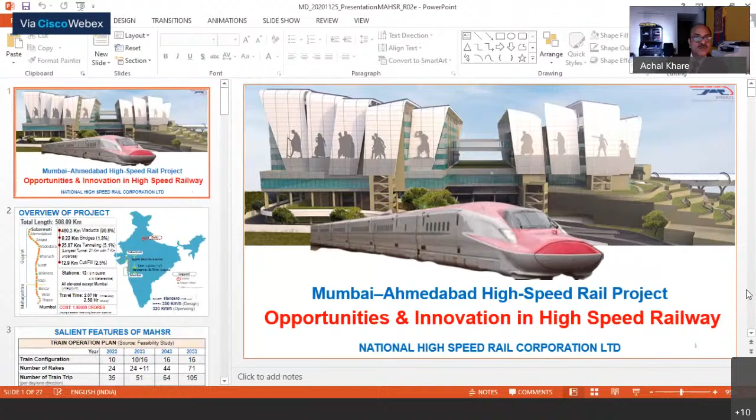You may put it on the slideshow. Okay, yes sir, we can start. Good to go. Let's go to the next slide please. Okay, I think this, no, first slide.

Most of the details have already been spoken by earlier speakers, but just to tell you, this is mostly elevated. As you see, 460 kilometers is on viaduct and around 25.9 kilometers is tunneling, which includes an undersea tunnel of 7 kilometers under the Thane Creek.

The total travel time: I wanted to make it clear there are two types of services. Limited stop, starting from Sabarmati, the trains will stop at Ahmedabad, Surat, Vadodara, Surat and Bombay, that will take 2 hours 7 minutes, and all stop will take 2 hours 58 minutes. Design speed is 350 km per hour, operating speed will be 320 km per hour.

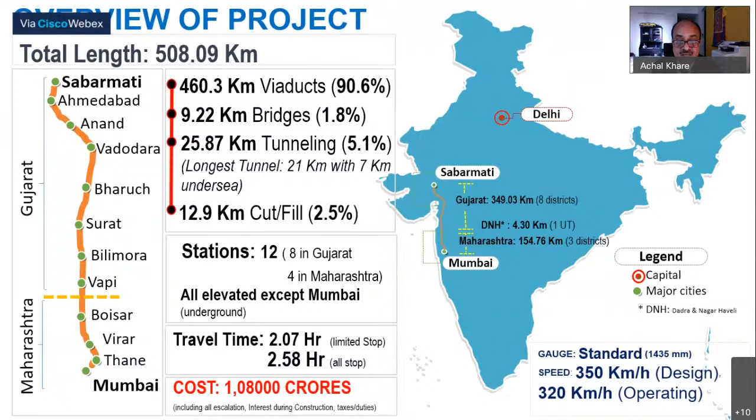Now, to begin with, we will start with a 10 coach train. We are procuring a total of 24 rakes. Each train will have a capacity of around 750, which may undergo a slight reduction for the luggage. Initially, we expect around 18,000 passengers each way, and peak hour frequency will be 3 trains per hour. Off-peak hour will be 2 trains per hour, meaning every 20 minutes you can expect a train, starting from 6 o'clock in the morning till 12 o'clock at night.

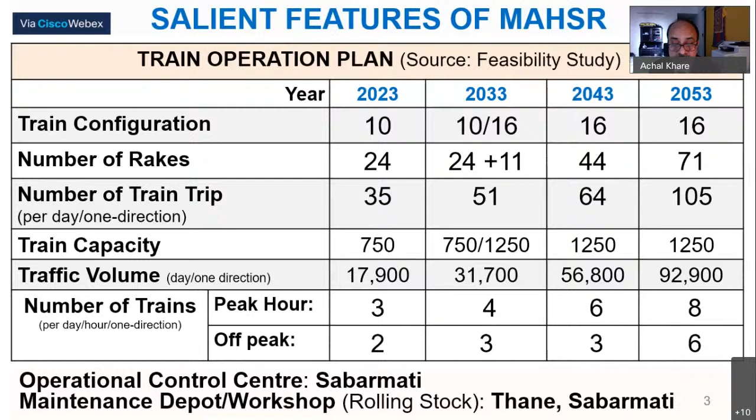Now this is something on technical features, some of you may be interested. We have 2 depots, one at Thane, another at Sabarmati. Sabarmati is going to have a big workshop also, so a lot of machinery requirement at Sabarmati. We'll have 12 traction substations, 2 depot substations, and 16 depot distribution substations.

OHE is for the first time in India going to use heavy compound catenary. 2x25 is being used in DFC also, but heavy compound catenary is being used for the first time. Total energy requirement will be around 1,100 million units every year. Signaling system is digital ATC, automatic train control.

Train acceleration is 0 to 320 km per hour in 310 seconds, and it will travel a distance of 18 km during this. Service braking is 167 seconds, so 8.5 km is the distance for braking. Power failure detection, emergency braking, can be done in 78 seconds, and still it will travel a distance of 3.87 kilometers.

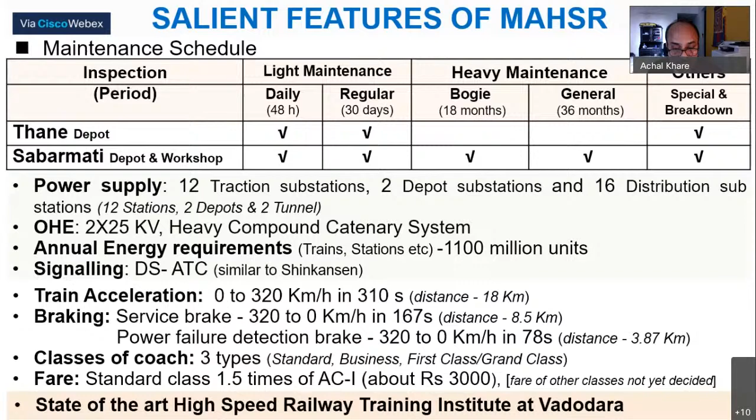There are 3 types of classes: standard, business, and first class or grand class as they call it in Japan. Standard class fare will be around 1.5 times of AC first, which will be around 3,000 rupees at the current rate. And we are coming up with a state-of-art high-speed training institute at Vadodara.

Now this I just wanted to share with you: for the first time in India, with Japanese collaboration, we are having a very effective disaster management system. These are all pre-warning systems: earthquake, rail temperature, wind pressure, and rain. I will not talk much about it because this is a subject in itself. But earthquake is, as we all know, Japan experiences a lot of earthquakes.

So this is a pre-warning system that as soon as a pre-warning is generated through the primary wave, they will be able to stop the trains before the secondary waves, which cause damage to the structure, hit the structure. So the basic idea is to stop train operation. Same way with rail temperature, the idea is if rail fracture takes place, stop the train operation. Wind pressure is the same thing.

If wind is blowing at a speed more than 108 km per hour, then operations will be stopped till the wind speed reduces. Rain is not a much bigger issue here because it's mostly elevated, except on the approaches of tunnels, so there we will be putting rain gauges to monitor. Criteria are yet to be set because it's not a very high flooded area, and being on an elevated route, it's not a big issue.

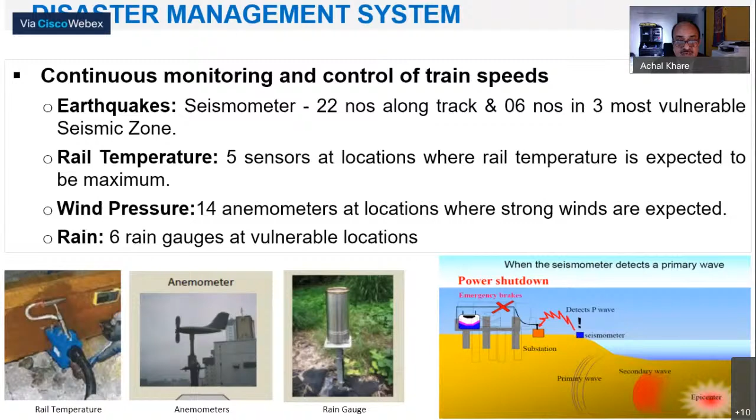Contract packaging may be of interest to some of you. There are 25 packages: 21 pertain to the main project, 4 to the training institute. Out of 4 in the training institute, 3 are complete; only the main building is yet to come up. And of the remaining 21, as Mr. Chaudhary congratulated me, we have already awarded 2 big contract packages, one for 237 kilometers, another for 88 kilometers, worth 32,000 crore rupees, in the state of Gujarat.

We have been making a lot of efforts to get maximum work allocated to Indian companies. As you know, whenever a project is funded by JICA, normally there is a condition that the lead partner will be Japanese. Here we didn't have that condition. We tried to put it in parts so that whoever is capable of doing a type of work should do it, giving preference to India, unless we don't have that technology and experience.

So with that, earlier a lot of civil engineering works were also with the Japanese, but now all civil packages are with Indians, and only the system packages - signaling, telecom, rolling stock, electrical, and the depot and workshop - are with the Japanese. So out of 25, 20 are with Indians, including track. In fact, track is a special technology, but they have been considerate enough to accede to our request and give track packages to Indian companies too. So with that, the Indian component has increased from 47% to 72%.

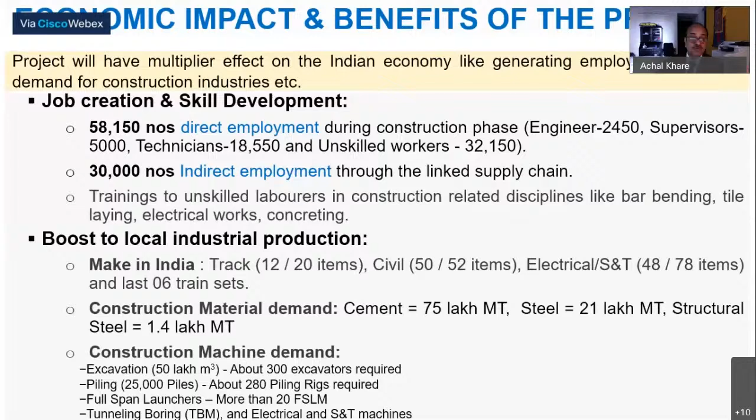Another big demand for construction machines. Around 300 excavators would be required, around 280 piling rigs will be required. This is a new item, full span launchers, I'll talk about it later. About 20 full span launching machines will be needed. Lot of electrical and signaling machines will be required, and we will be needing 3 tunnel boring machines to do that undersea tunnel work.

This has already been spoken to, but for the sake of clarity, I will again repeat. We have been entrusted by Ministry of Railways with this job of preparation of 7 detailed project reports. They are all listed here. We have already submitted the report for Delhi Varanasi, and others are in the making.

Even this work has resulted in the use of lot of new technology. I can share with you, when we were doing Mumbai Ahmedabad, using lidar was highly questioned, that why are we using lidar, it may not be possible to do with lidar. But we went ahead and used the lidar technique to do our detailed survey for Mumbai Ahmedabad. I am very glad to share that now for these 7 corridors, there is good competition. There are already about 5 companies in India working with lidar technique. That's the benefit of having such projects. When we did Mumbai Ahmedabad, we could hardly find one agency to do the work, and now within 3 years we have 5 agencies to do this kind of work, and there is good competition.

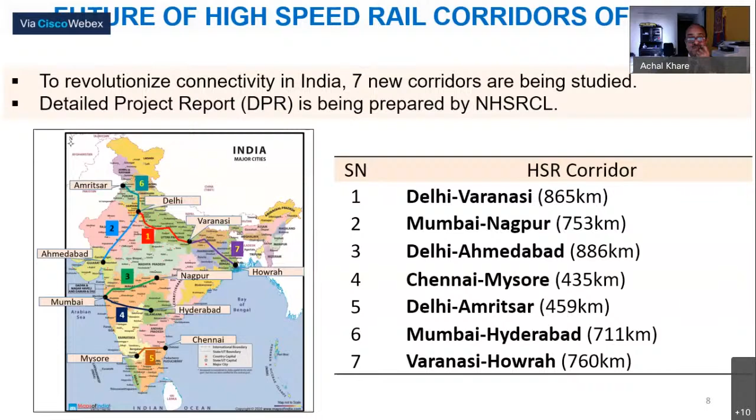So with that in view, we created a high-speed rail innovation center trust. All those areas where we need to go for innovation using Indian material, Make in India, it is with that purpose that we involve academicians to do the research work for us, also involve the industry, and first NHSRCL as a user to suggest such projects. We have a number of IITs, all major IITs are our partners, they are in the advisory council - IIT Delhi, Bombay, Madras, Kharagpur, Roorkee, Gandhinagar. They are all on the advisory council, and we have Railway Technical Research Institute, Japan, as in our advisory council, and University of Tokyo. I'll briefly discuss some of the projects already identified for R&D.

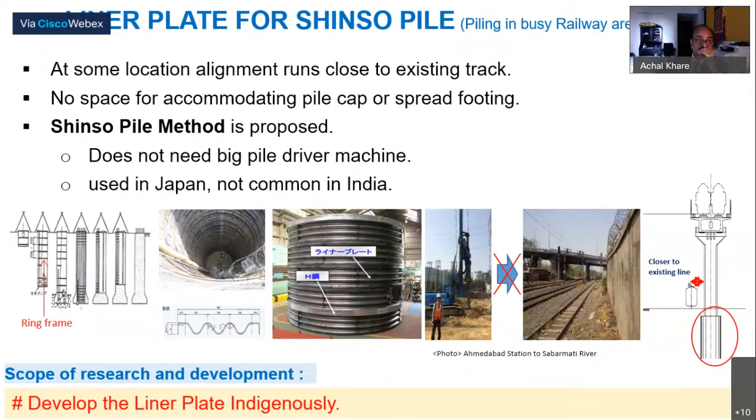Now, damper stopper is another item. Currently, this is being imported from Japan. This is one item in civil engineering which is being imported from Japan. The use is once you put such damper stopper on the pier in a continuous girder, then the force is distributed, earthquake force is distributed, and your design becomes optimum.

Now, this is one challenge. We had two challenges. One was a steel box stopper, and another is this seismic restrainer. Fortunately, one of the companies could develop a steel box stopper, and one prototype is being kept in Vadodara Training Institute for anybody to see. We have a huge requirement of steel box stopper, and seismic restrainer is another item. If we are able to develop it, then probably something which we can think of implementing straight away in the Mumbai Ahmedabad project, substituting it for the import.

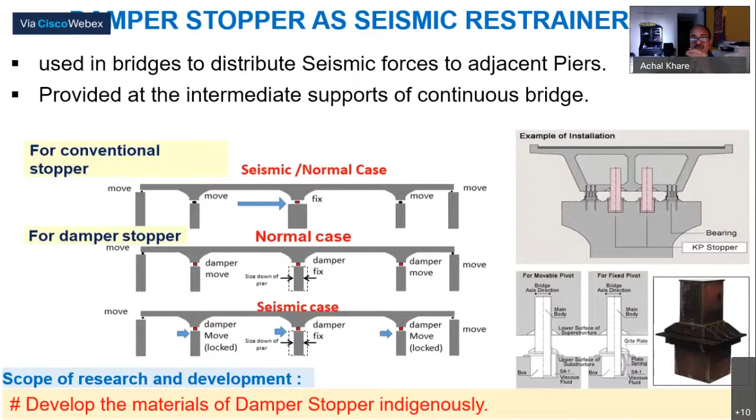To very frankly share with you, when Japanese were insisting to use elastomeric bearing, I was quite reluctant. I said quality is a big issue, and we always talk about the jacking point and how to replace the bearing. Before you put it, we always discuss the method of replacement of the bearing. Then they were very shocked. They said, why do you say so? Why do you need a jacking point to lift your girder and replace the bearing? I said, because bearings are getting replaced every 5 years, 6 years, 7 years, sometimes even less than a year.

And they said, you come with us. I went myself, saw their bearings. They said, this is more than 30 years old, we have not replaced it. So now that's the quality. So the point is not number. The point here for the industry is the quality.

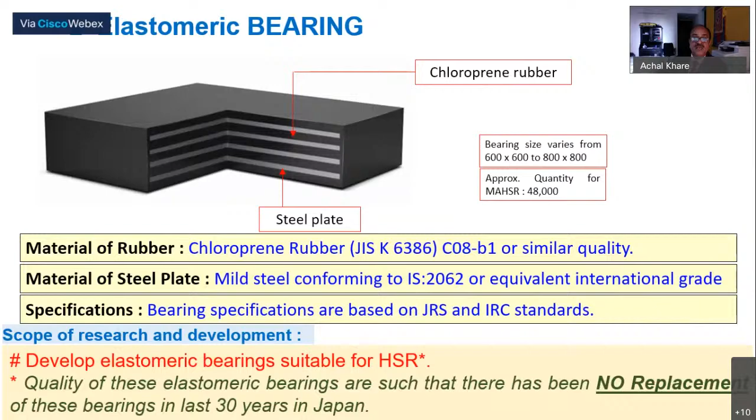And if you see the requirement on the Mumbai Ahmedabad project alone, 48,000 elastomeric bearings will be required. That's the kind of scale. And let me share with you, there is hardly one or two suppliers so far who have been able to come closer to this quality in India. Others are not. So it's a challenge for all of us. I'm not criticizing anyone, but it's a challenge for all of us to come to the required standard if we want things to be done in India with Atmanirbhar Bharat.

Now, geosynthetic reinforcement wall is another research area. In Japan, they have used RE wall for a height up to 11 to 13 meters. But in India, in railway sector, we have not used RE wall. It's very effective, very cost effective. Even structurally, it is better in earthquake resistance. So this is something which we need to develop.

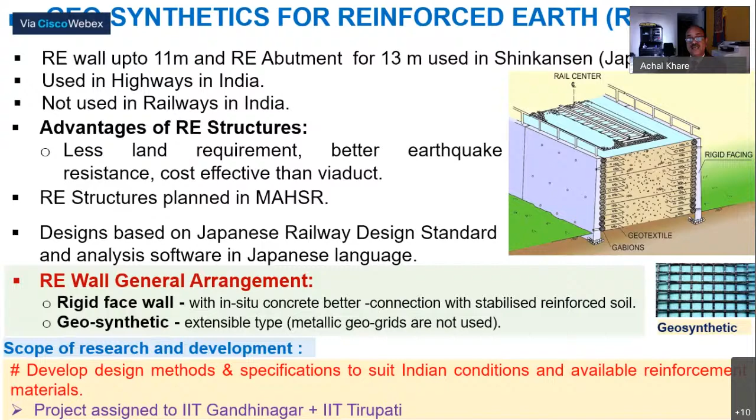For that, we need to develop the geosynthetic material in India. This was one of the research projects which we have taken in the trust. And if you see the bottom line, this research project not only includes computer modeling, but will also include development of prototype, development of testing protocol, and then testing that embankment using Indian material. So this project has already been assigned to IIT Gandhinagar and IIT Tirupati together to work on this. Hopefully in the next 3 years, we hope that we should be able to get a design with Indian materials.

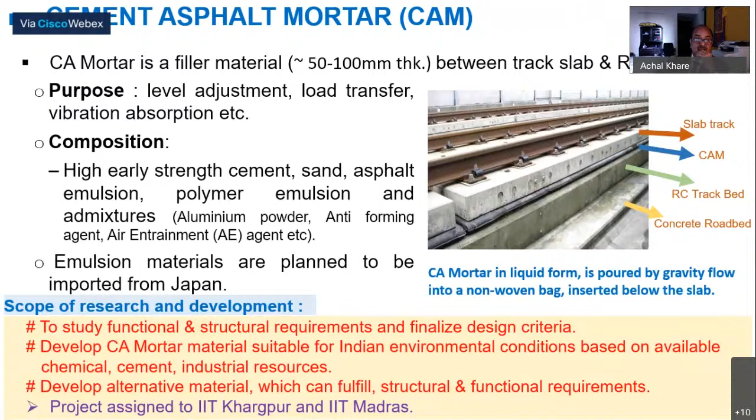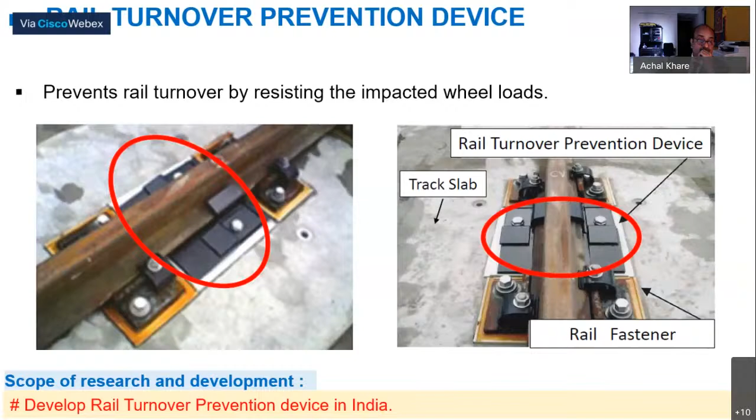Now, these items and details are available on our website, and those who are interested, I can put them in touch with the concerned person of NHSRCL to have it further discussed technically. I have shown it to various IITs also. They would be very keen to join with the industry in case some industry would like to take their help.

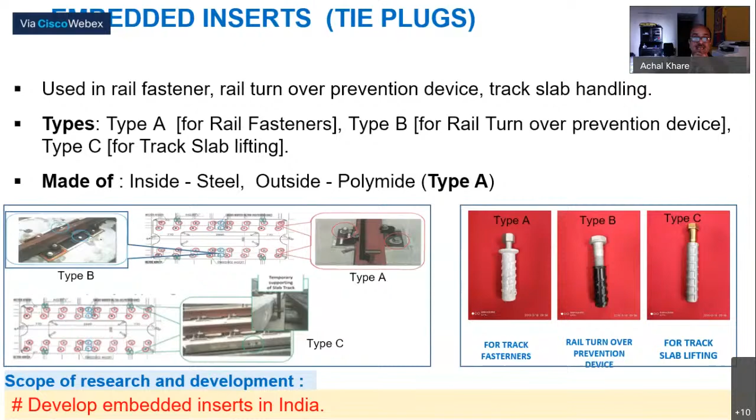So you can see the number, and for the benefit of Indian companies, we are setting up a detailed, elaborate training facility at Surat. We have tied up with Japanese consultant JARTS, whose experts will come and train the Indian supervisors, workers, and everyone else in the whole list required to be trained before they are put on the job. So it's training and certification - only certified people will be put on the construction job.

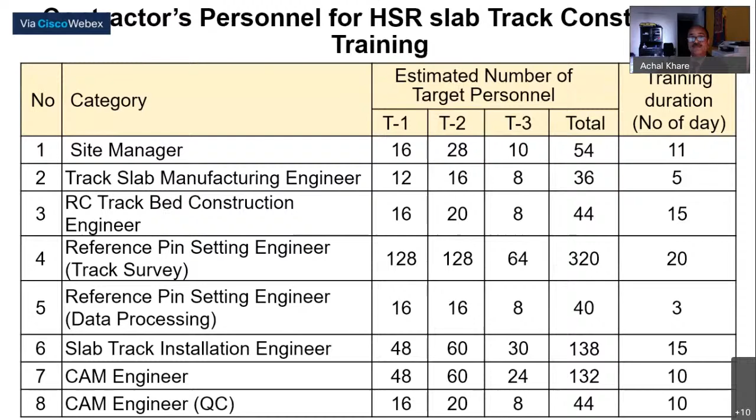Next, please. This is a similar table, just to make you appreciate that about 15 categories of people will be trained before the construction job is taken up by the Indian companies. Next, please.

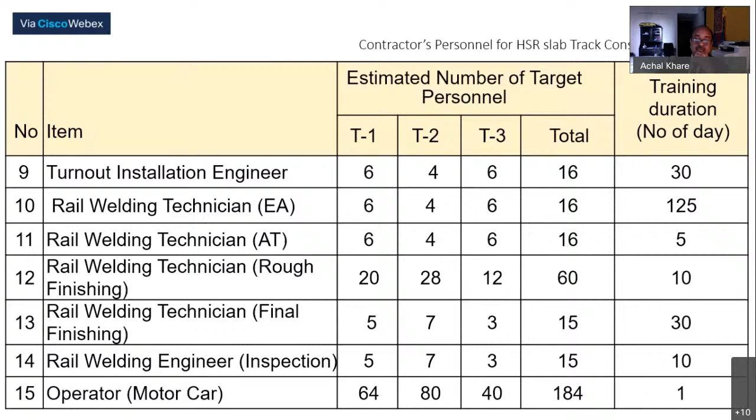Now this is one of the very big challenges in rolling stock industry. I'm posed with this very common question of whether we are going to make high speed rolling stock here in India. Metro coaches are being built, but are we making rolling stock of high speed in India? Let me share with you, there are large amounts of items which are currently not being manufactured in India.

Just to give you a glimpse, the high-speed coach body is made of double skin hollow aluminum extrusions, and this is 25-meter long hollow extrusion. Currently, it is not being built in India. You will appreciate that for a train moving at such high speed, noise is a big issue. Unless we use double skin extrusion shell, it will be very difficult to control the noise level, and passenger comfort will be sacrificed. So this is one such item.

There are many more such items in rolling stock, including the upholstery. The upholstery being used in the high-speed system in Japan, we are not manufacturing that kind of upholstery. There is a slide on that also. So a whole lot of things.

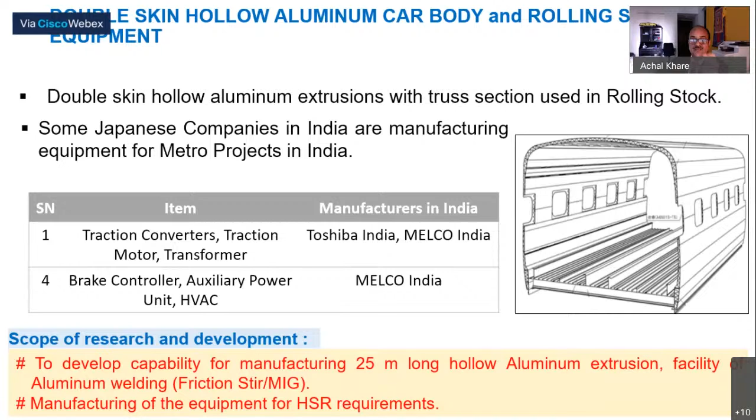The industry needs to gear up to understand this. Currently in metros, stainless steel shells are being used, not the aluminum shell, but we need aluminum because it is a double skin hollow aluminum shell. Otherwise, the axle load and the weight will increase, and that we cannot afford. Therefore, we need aluminum, and it is much more energy efficient because the weight is less. Next, please.

Of course, one project will not make a business case, but if we are going to have many high speed corridors, this will make a business case. So industry people willing to work with a horizon of 3 to 4 years, assuming at least 3-4 more corridors will come, are most welcome to discuss with us future opportunities on development of this copper tin alloy. We have taken up this project with the IITs for developing an alloy to take care of the required properties. Next.

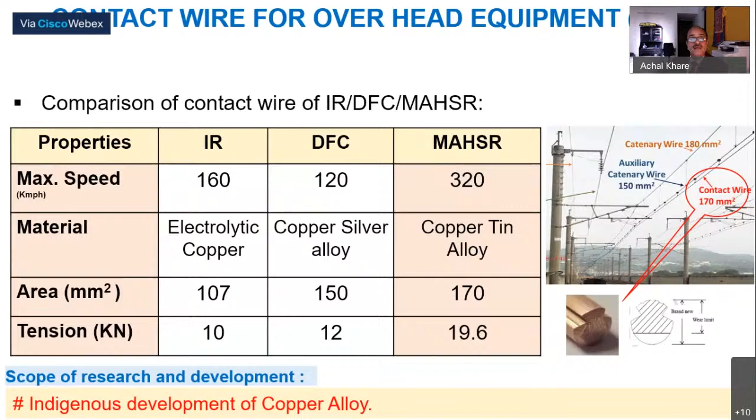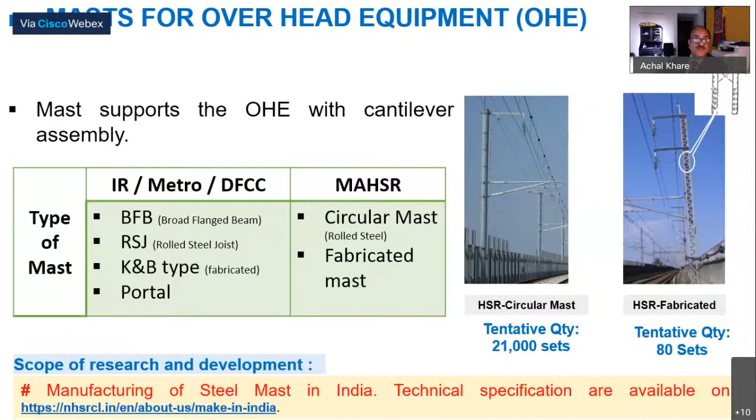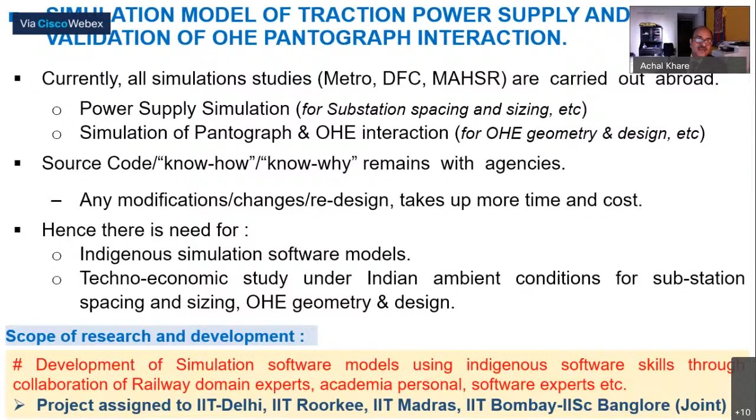We took it as a challenge that India, being a leader in IT, this simulation is nothing but preparing a computer software model. A lot of IT companies showed interest, and independently we have assigned these projects to IIT Delhi, IIT Roorkee, IIT Madras, IIT Bombay, and IISc Bangalore to develop it. Within one year, they have promised to give us an Indian version of the simulation model for such a study, and none of us—neither the metro, DFC, nor railways—will be required to go to any foreign consultant to get this kind of simulation done.

Next, please. Now, this is one big challenge for our project.

So we have envisaged this kind of construction arrangement. If we are to build 237 kilometers—the contract which we signed yesterday—237 kilometers in 4 years, there is no other way except to use such techniques.

Now, these carrier and launchers are currently being manufactured in China. So this is one of the challenges which we have already posed to the industry, including L&T who have been awarded this work, and to academicians: why can't we develop such carrier and launchers rather than importing them from China? Each of these launchers, just to give you an idea, costs around 70 to 80 crore rupees, and we would be needing around 20 to 30 launchers on this project itself. If capabilities are developed in India, maybe metros and many other organizations would stipulate the use of such machinery, because it increases the rate of progress quite substantially.

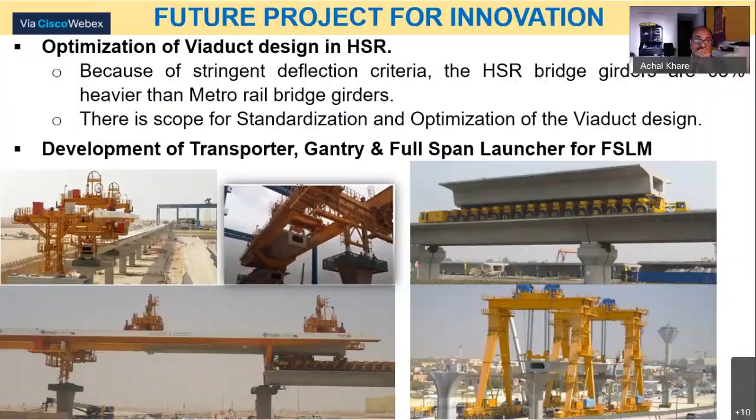They don't stop the train in case of fire because they are 100% sure the fire will not propagate. So that is a change from what is practiced in the UK and US versus what is practiced in Japan. This is again a challenge. Once the Ahmedabad Textile Industry is able to come up with results, we have given them another task: to come up with the composition of the material and ask Indian industry if they can produce that kind of upholstery. Next, please.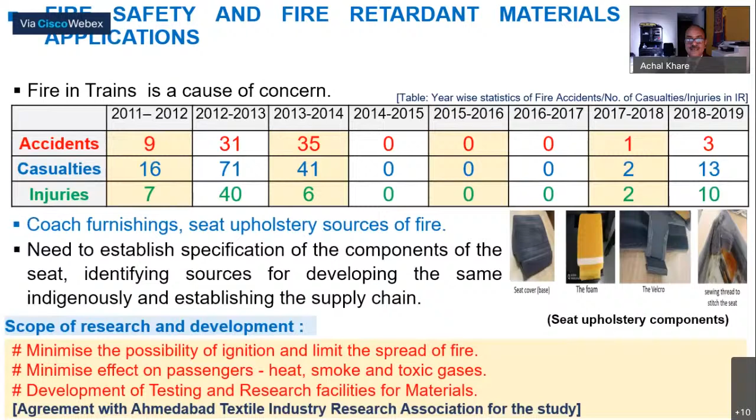Now, this is one of the challenges—I think somebody mentioned upholstery. So I just wanted to flag this issue: the fire retardant characteristic of the material for HSR application is very important, and it is currently a challenge for the Indian industry. Next, please. I think that should be the end. Thank you very much.

Thank you very much, Mr. Khare. Very detailed presentation with huge opportunities available with high speed rail corporation. And we have some questions with us, though most of the questions that you have already answered in your presentation.

One question is from Mr. Dhruv Agrawal, co-chairman of our railway committee. He asks, is it still possible to try and develop any product, or is it too late for this current project which is ongoing right now?

It depends. You see, as we move ahead with the project, certain decisions have been taken, but still some of the products are open. So if you let me know which project or which product you are interested in, we can definitely come up with something.

Let me put it in two categories. We have already decided the products which are open to India. Now, these products, even though they are not currently available in India, you are free to develop them now.

One example is the rail turnover prevention device. This is open to India, not yet developed, but it is open. So any industry which comes up, we will use the Indian component. Even if it takes about a year, you have an opportunity to come up with this component. That's just one example.